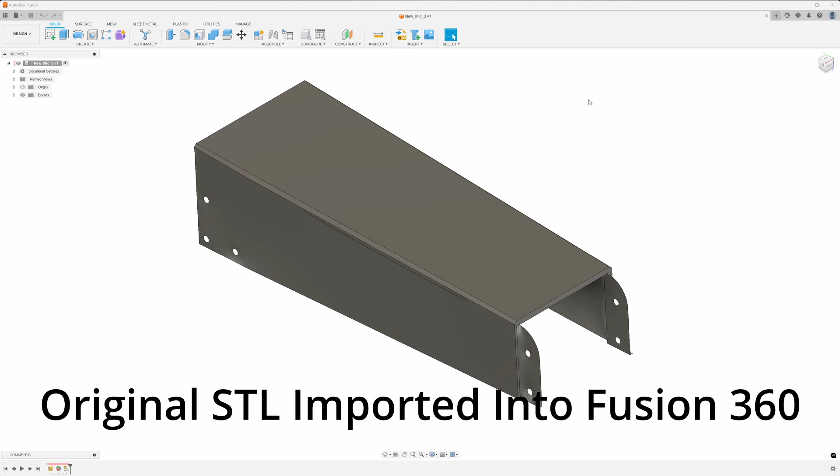Okay, so I imported each of the body sections, the mid 2, the mid 3, and the nose. The reason I do that is I want to take some dimensions from them, and that's all I want to do is take dimensions.

So I'm going to measure across the back of the flat surface. I'm going to go ahead and measure the front for just the flat section. I'm not worried about this chamfer area. Then I'm going to do one from the very front, excluding the tabs, to the very back. I only care about the visible top, that's all. I'm going to write those 3 numbers down, and then move on to the next one.

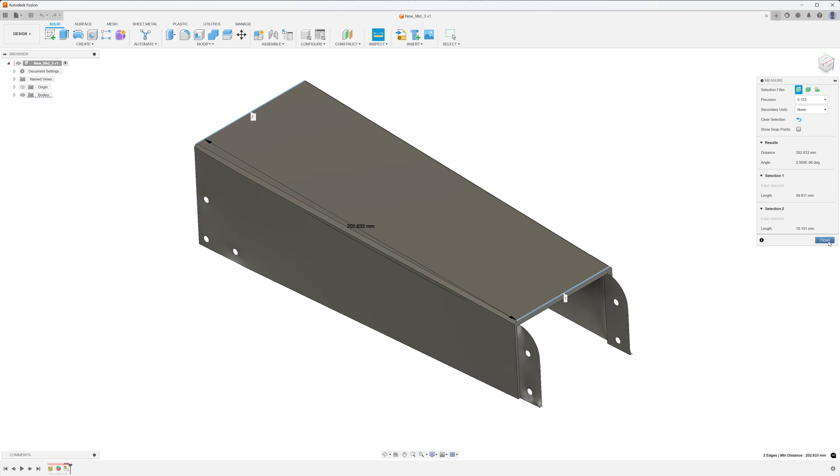The next thing I did was I started a whole new design, and came in and started from my first sketch. I drew each of the 3 pieces, here would be our midsection 3, 2, and the nose. All of these are turned into construction lines. That's all there is to step 1.

When I came down to the nose, this mark here at 155 millimeters, that is where the opening for the servo starts. Now I need to know where that's at because I don't want my design going into the servo area, that's my cutoff point. You can go down below if you want, but for my particular design, that was the ideal cutoff point.

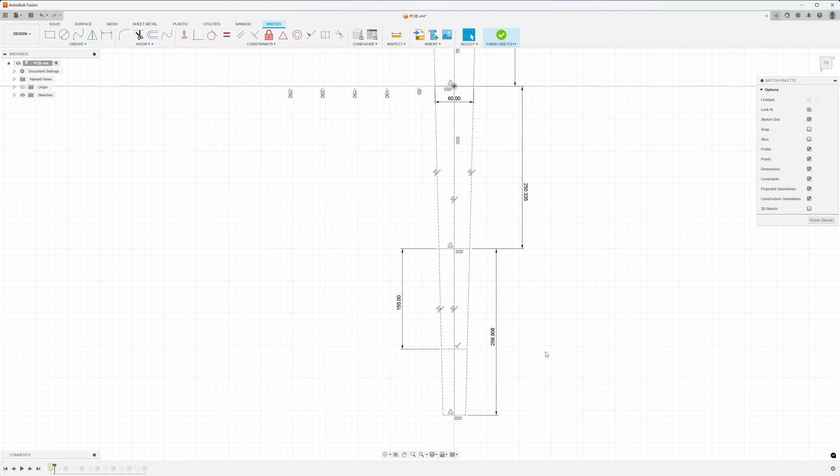The next thing I did, finish sketch, was I started a new sketch on that same surface. All I did was offset from each side 3 millimeters. The reason I offset that is I did not want my design getting too close to the edge because I'm not real sure how perfect this is going to work. So I just have these two lines as boundaries.

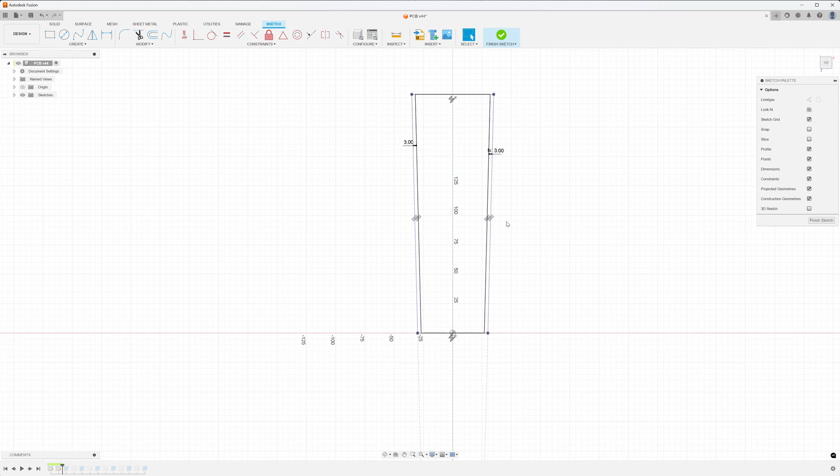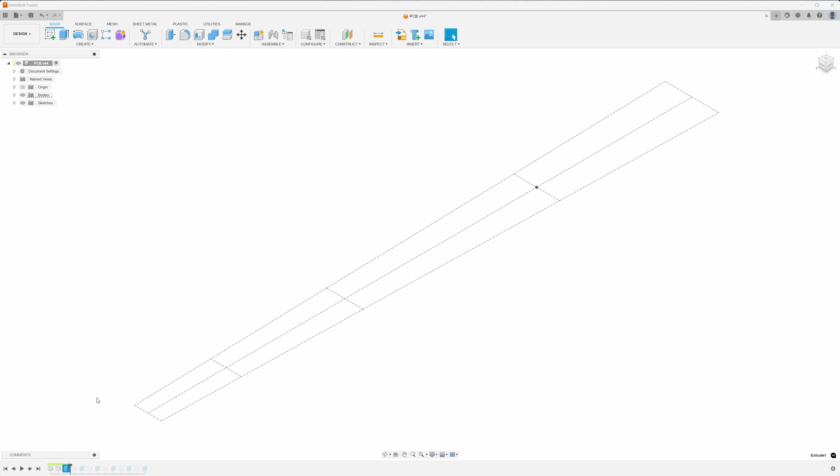What I do is I go ahead, finish that sketch, and do an extrusion of that sketch, just that section. Home view, so you can see what's going on here. So it's just this section here, and I'll show you my settings for that. I believe it was 1 millimeter, yes, I extruded upwards 1 millimeter. Go ahead and hit OK there.

The next thing I did was I started a sketch on the top surface here. I'll show you that sketch, and this sketch here is my actual design. See, there's a lot going to it. Doesn't look like there's that much involved when you see the print, but what I did was I drew up my design right here on this section.

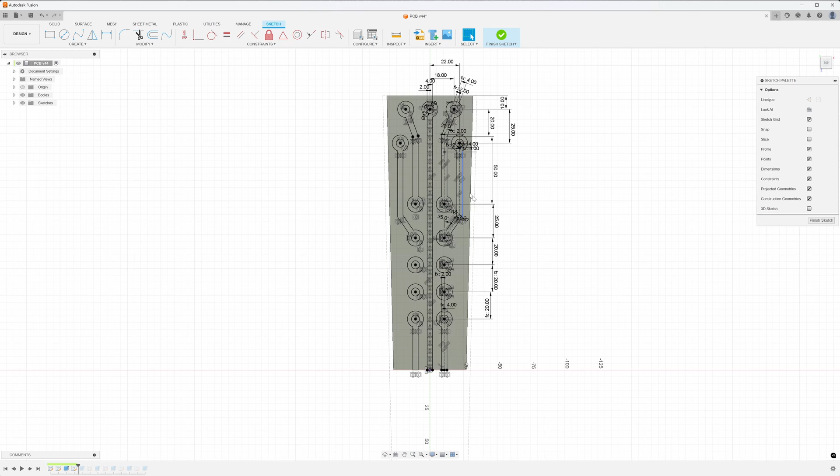I repeated this process for the next one and all the way down to the nose. Now let's go ahead and I'm going to finish this and show you what I did as far as my extrusion. I'll explain why I did it.

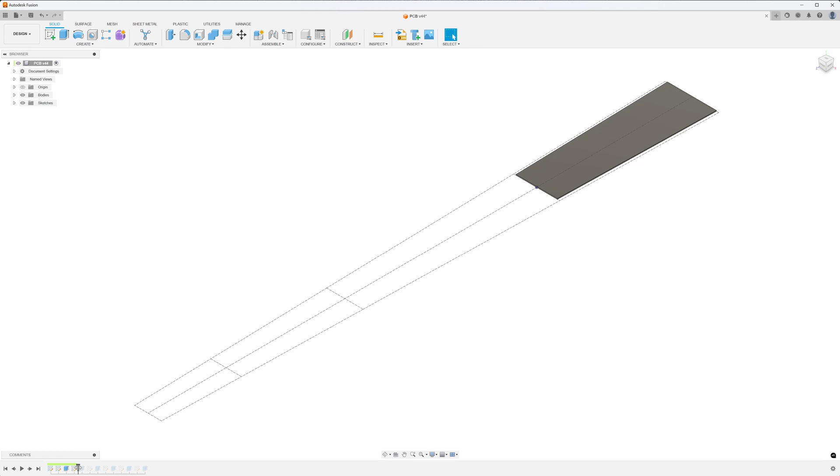So with the extrusion here, I also extruded this up 1 millimeter, and you'll notice that it is a join. The reason I did it this way, by having that first extrusion, the base, and joining this to it, it gives me one body. If I didn't do it this way and just drew all these individual shapes, each one would be its own body, and that's a lot more to work with than I wanted.

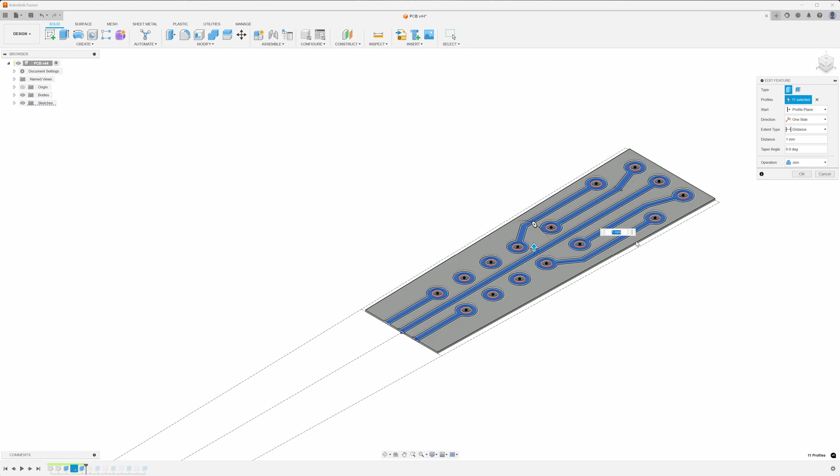It ended up working out better for me when I got to Bambu Studio. So I went and extruded this 1 millimeter. I had canceled that out, and I renamed that to be mid body 3.

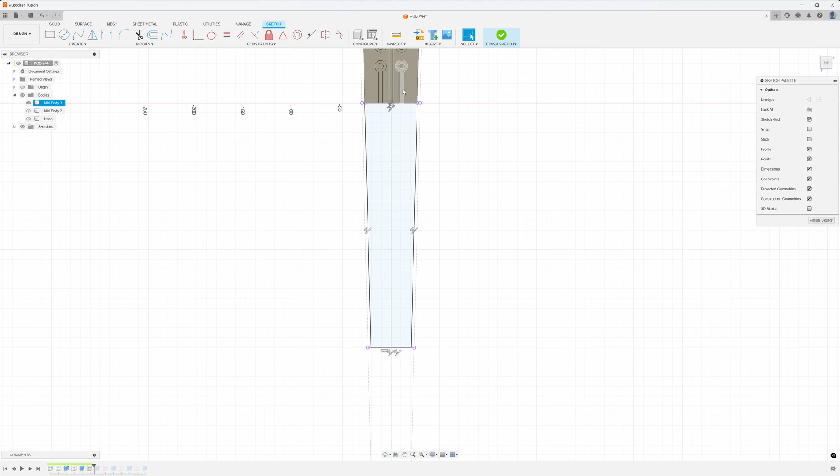Now we move on to mid body 2. I'll show you how I did that sketch. It's exactly the same as the first one. I went to edit sketch, just drew the outside shape, and made sure that these lines here were collinear to my lines above. I had my basic shape, finished that up.

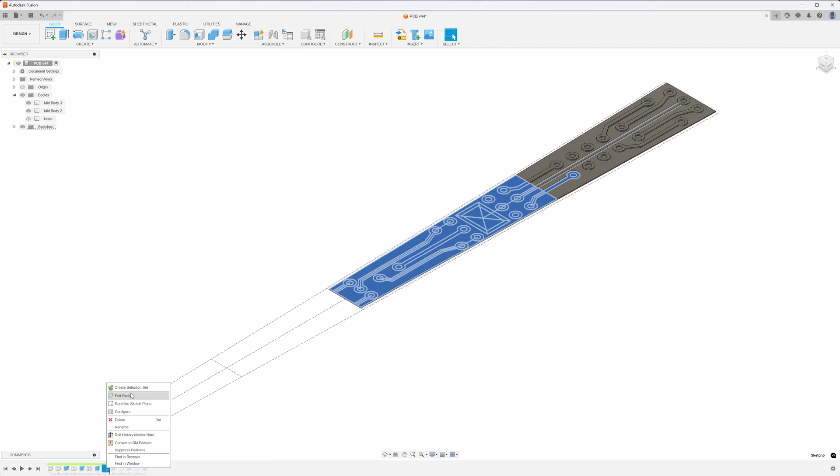I went ahead and extruded that just as we did before. I started a new sketch right here on the top of that surface. Let me show you that sketch. I'll start it right up here at the top. By having my lines collinear to each other, I was guaranteed that when I put my parts together, they'll actually line up. That was the whole point with that. It's real easy to do.

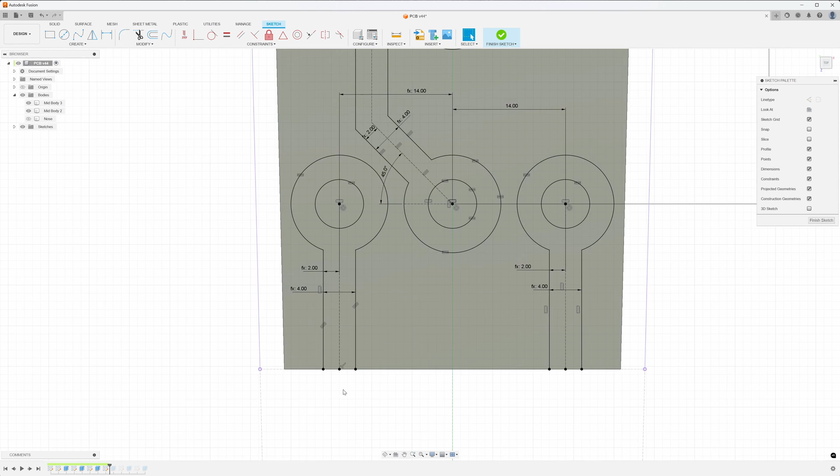You can see down here at the bottom, I'm setting up to do the same thing when I get to the nose section. I'm going to go ahead and finish this, and we'll take a look at the extrusion, which is going to be the same method I used on the first one. I extruded that up also 1 millimeter, and it's also a join.

Now, the one thing I do need to point out is I'm going to come back here to my base for this one, and we'll look at the extrusion real quick again. Notice that it is set as a new body. Extrude that as a new body, and then when you come to this feature here, make sure you extrude that as a join.

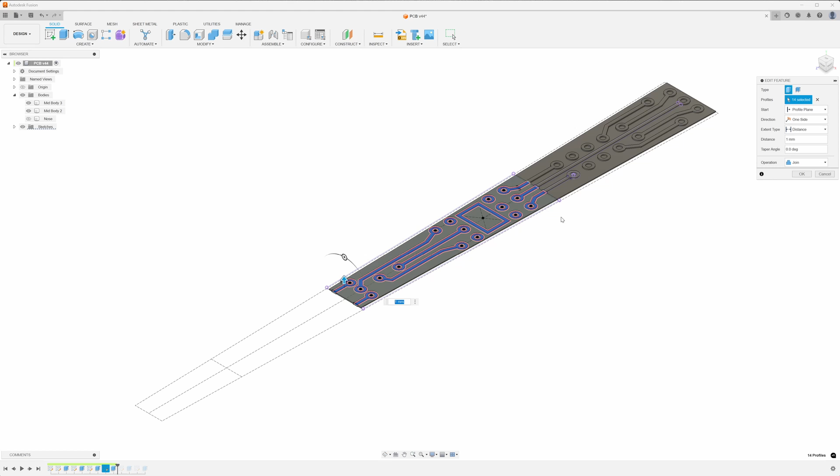And if you want to guarantee that it's going to join to this new body instead of the first one, what you do is hit the eyeball while you're doing your extrusion, and that'll turn that off. The base will become a new body, and the next extrusion just joins to it. You can see where I named that mid body 2.

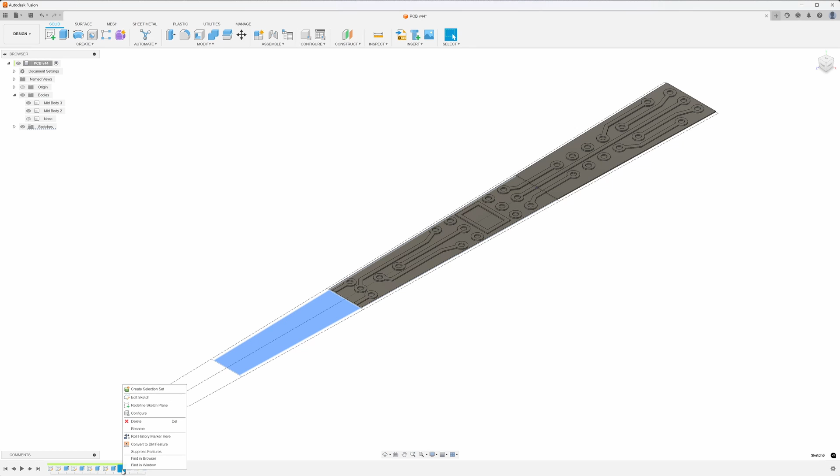So let's go ahead, I'll turn that back on just so we can watch what's going on here. And I move on to my next sketch, which is the nose, using the dimensions that we took earlier. You can see where I cut everything off at 155 millimeters, the overall length on that, so it would not go into the area of the servo.

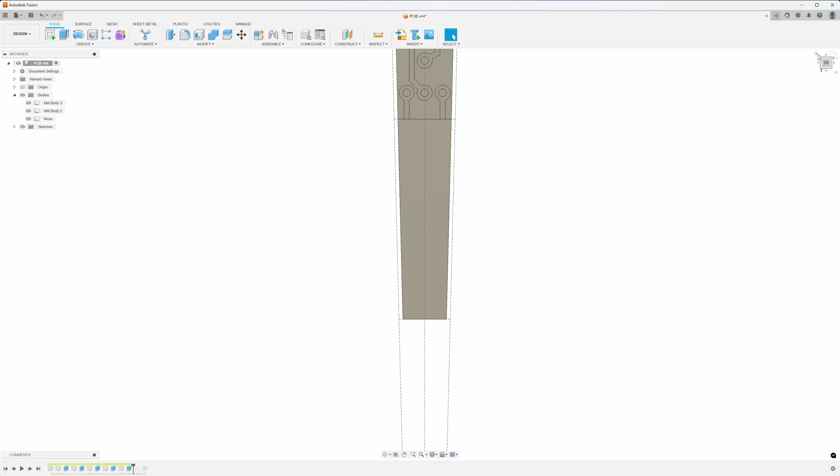It's the same thing, I finish the sketch, come in and do an extrusion. This extrusion here is going to be a third body, which again, new body. That's what I did, same way as before. I came back, started a new sketch on top of this surface, and lined everything up once again like we did before. Lined it up here, so when I put the pieces together, they're all looking good the way they should.

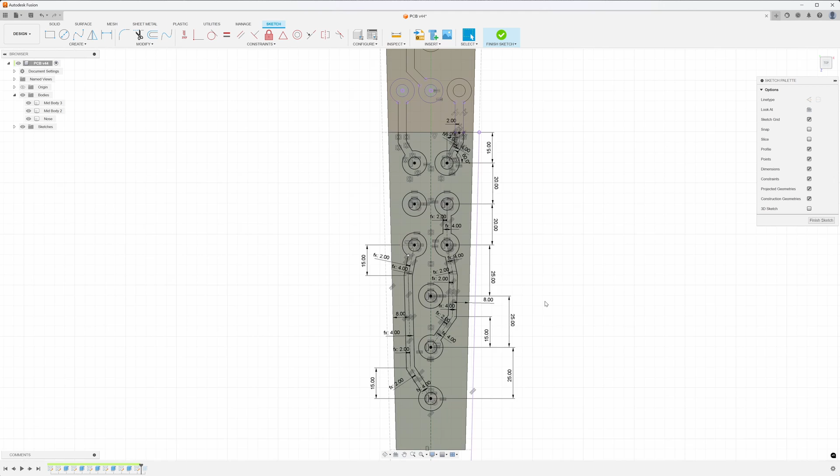I finished everything out, and my design stopped right here. The servo area is right here, so I go ahead and finish that up. Back to our home position, and we'll take a look at that. And there we go, all of our pieces line up.

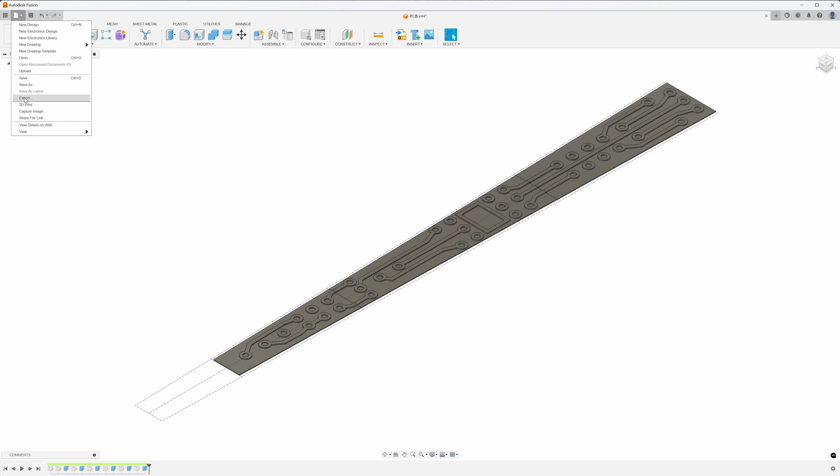Now, the normal reaction from a lot of people when they're working with Fusion is to come up here and hit the export. In this case, what I want to do is right click on mid body 3, and there's one in the middle here, so right click, hit save as mesh, and it'll give you your options, hit OK, and tell it where you want it to go. Do the same thing for the other two.

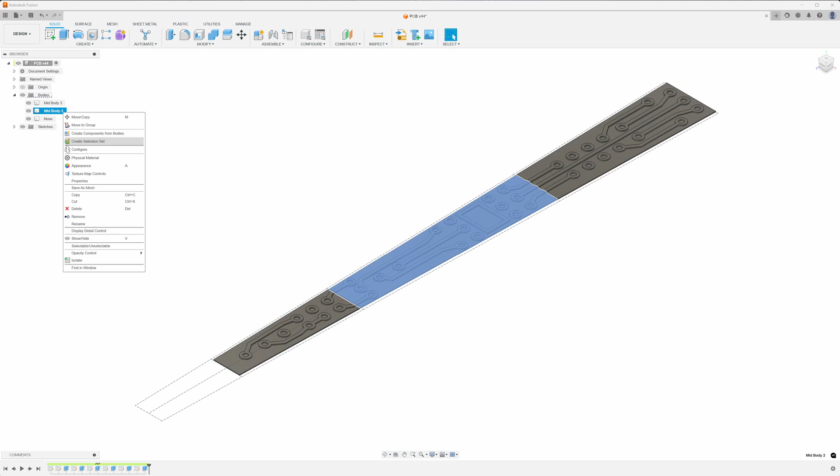So we got mid body 3, we got mid body 2. You'll want to come down, save as a mesh, hit OK when your settings are the way you want them. Actually, the settings you're looking at in this dialog box are the settings I used. Go ahead and export that, and then the same thing with the nose. That way you're guaranteed that all 3 come out as 3 separate STLs rather than one big long STL. And that's going to be important when we get into Bambu Studio.

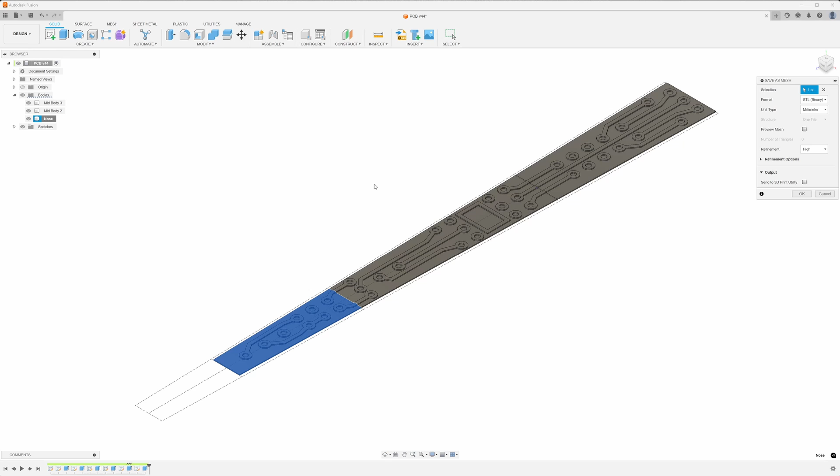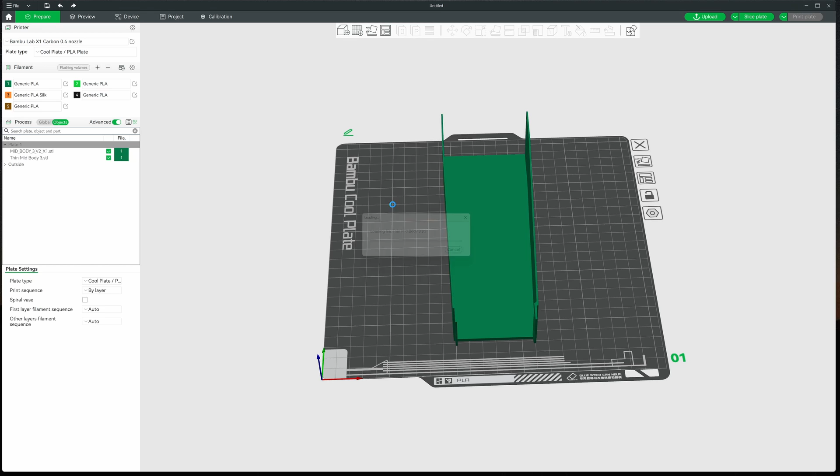Let's jump into Bambu Studio and I'll show you how I put these together. Okay, so I have my body section loaded in, and the first thing I'm going to do is rotate it. I want it to be straight up and down, front to back when I'm working. Okay, good there. The next thing I want to do is bring the piece over that I drew, which corresponds to this body section. So I'm just going to drag that over, and there we have it.

The first thing I'm going to do is change the filament color so it's easy to see. I'm going to want to use this color anyway in a little bit. Next, I'm going to come in and make sure that this surface is laying flat on the print bed.

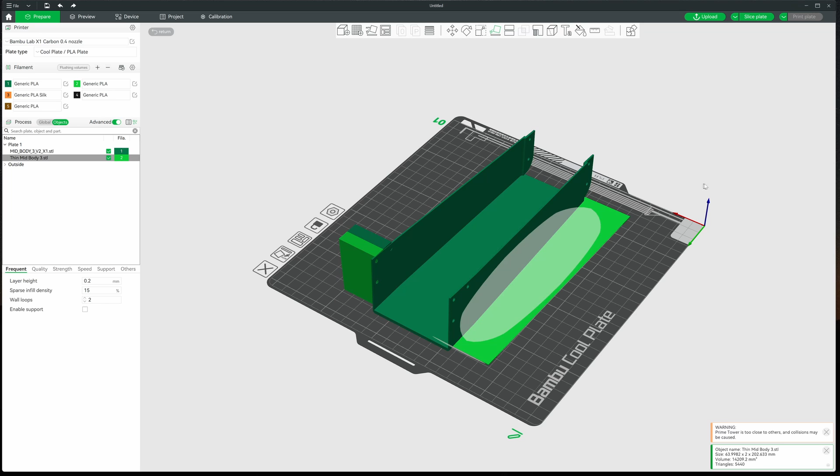Go ahead and I'll do that. When we look underneath, I can tell I'm oriented in the wrong direction. We'll fix that real quick. Click, I'm going to rotate that 180 degrees.

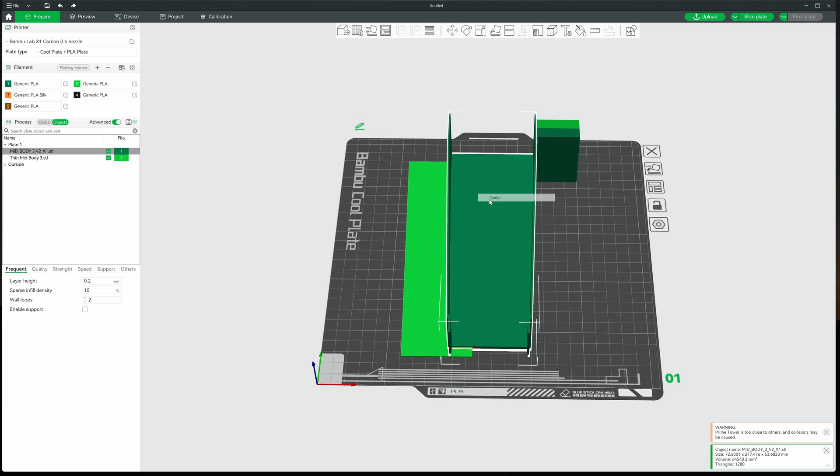That looks better. Next step, I'm going to click on my main body, right click on it, and hit center so it's centered on the bed plate. Then I'll do the same thing with my part from Fusion, go ahead and center that. Now I can tell just by looking at it that it's not lined up right.

Not a big deal. What I like to do is come straight on from the top. Turn that off so we can watch what's going on.

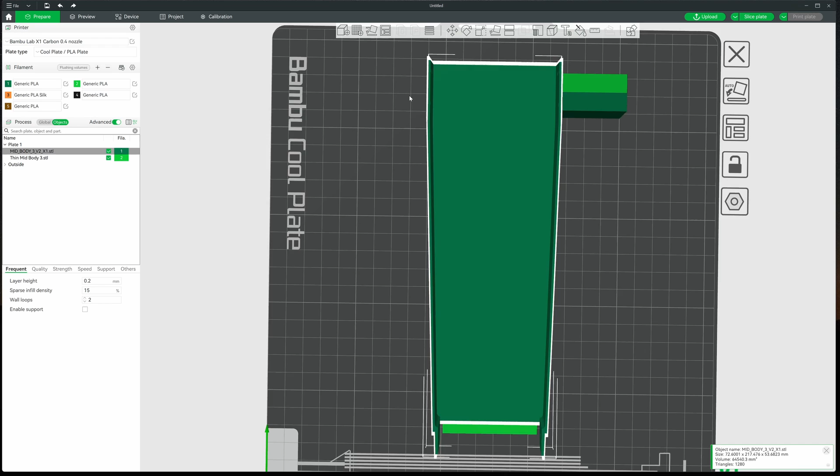I'm going to do a move, just drag it up. Wrong piece, that happens to you. Just right click and center it again. Good, I want a part from Fusion.

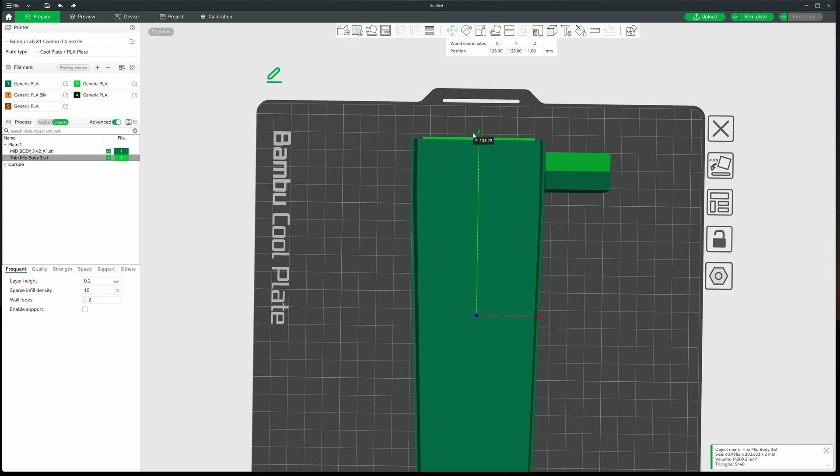There we go, drag that up and you can see it peeking out there. I'm just going to move that until the edges are lined up. Pretty good. So when I come underneath, I can see that I'm lined up on end the way it should be. So we're good there.

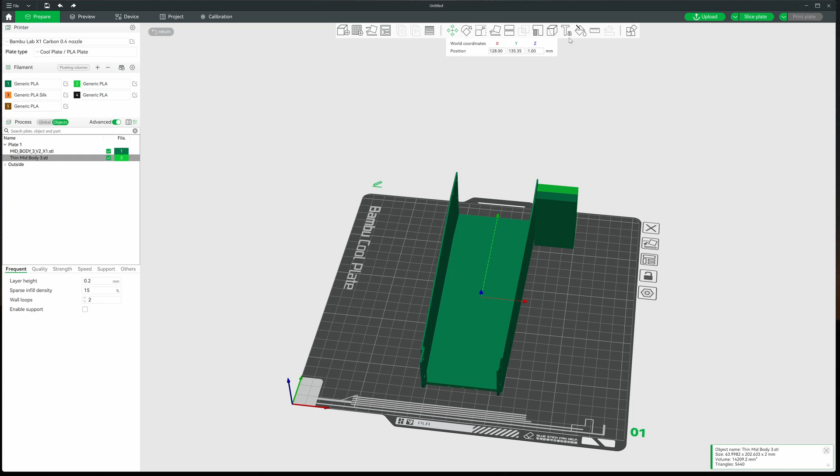Now I want to do some painting on that piece from Fusion. Actually, I don't have to turn off anything, I already have it selected from objects over here. I'm going to go to paint, and what I want is my base to be the same color as my main body.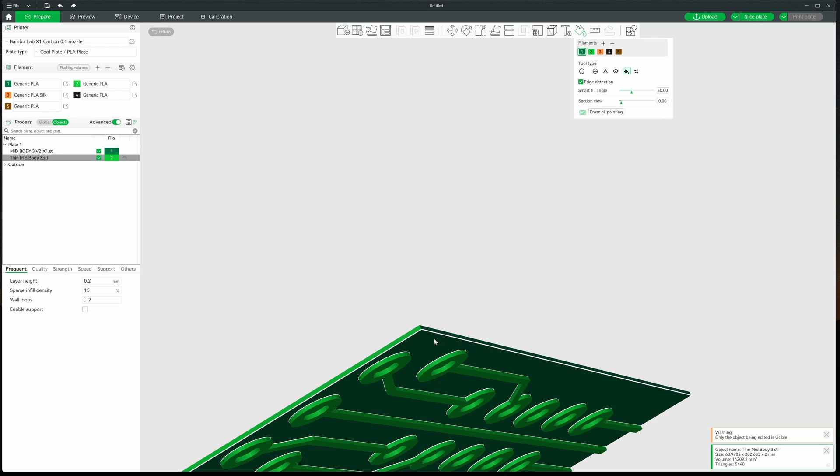All the edges except for this front edge - the front edge I'll leave the way it is. I'm going to go ahead and change the other edges in here real quick. By having that the same color, and it'll make more sense in a little bit, that will save me filament. Otherwise I'd be doing a lot more color changes.

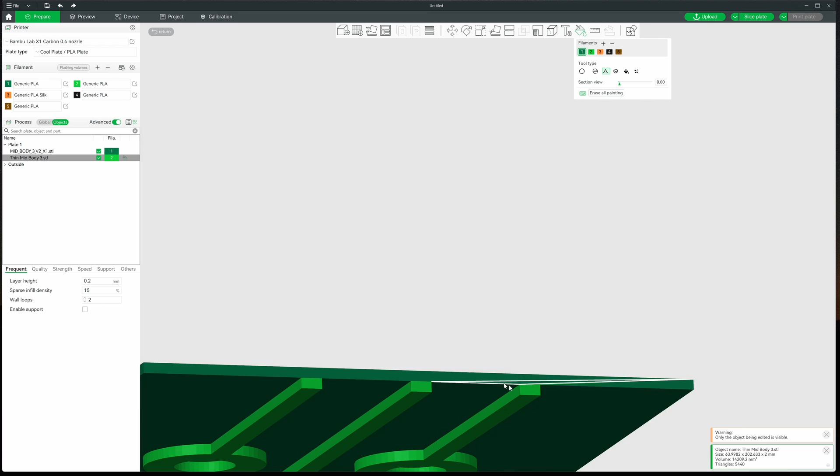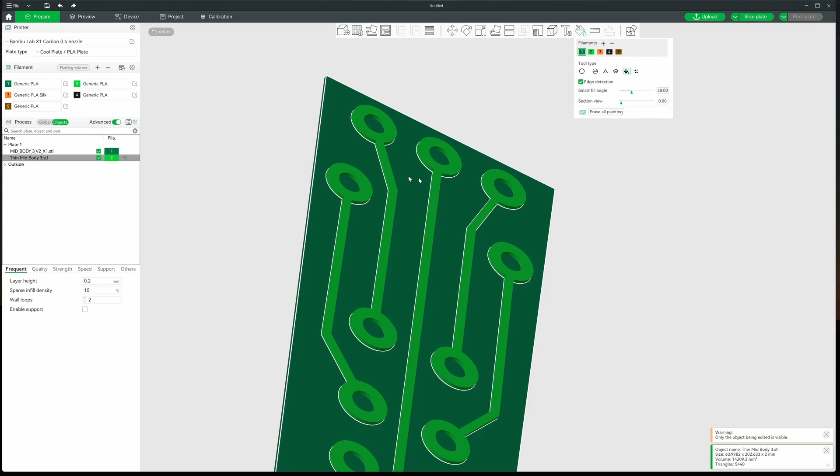All right, so I have everything painted the way I want. No, not really - I want to go back using my bucket tool. I'm going to fill the inside of all of these solder pads. But what I also want to change, I have some copper filament, copper PLA silk actually, I want all my solder pads to look like copper.

So I'm going to come in here, select the right color first. The reason I'm going with the triangle is so I can block off these points. Then I'll go back to the bucket. Otherwise the bucket would fill the whole line, and I don't want that.

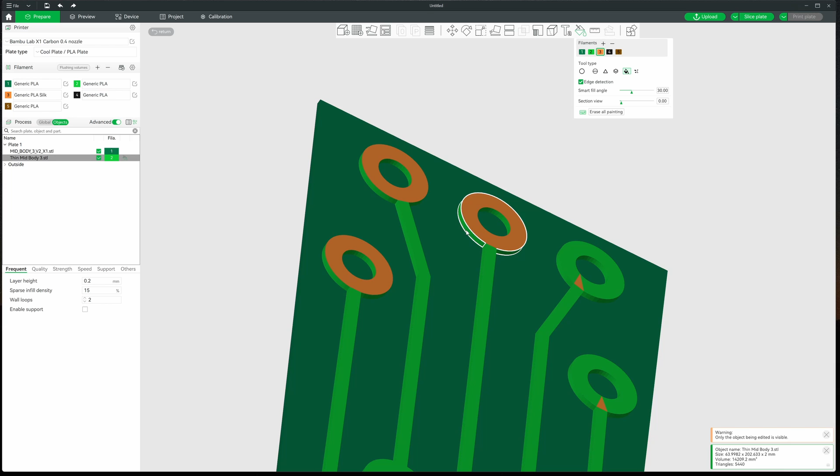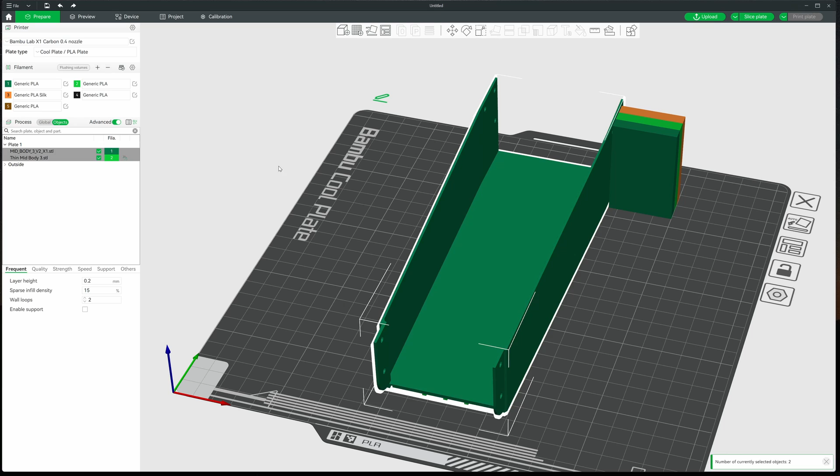Okay, we have everything painted up. Go back to work, what I'm going to do is flip this back over. Now I'm going to select both pieces. You can do it by coming over here to, when you're set to objects not global objects, click the first one and hold your shift, click the second one, you got them all.

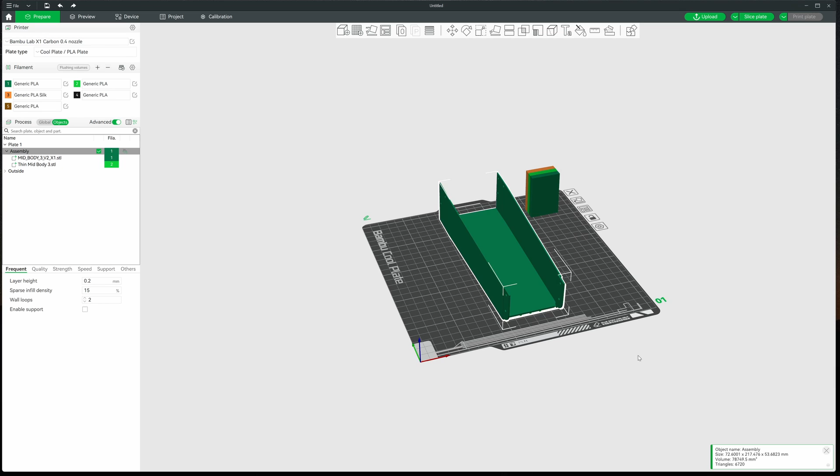Another option a lot of people like to use is from out here, using the shift window, which will select them all. It doesn't much matter. So now that I have that on there, what I'm going to do is right click and hit merge. And now I have one body, one piece.

I can send this to the slicer and get my color print, hopefully looking like this. Go ahead and slice this up, take a quick look at it. It's going to take roughly 2.5 hours total. And everything's looking good.

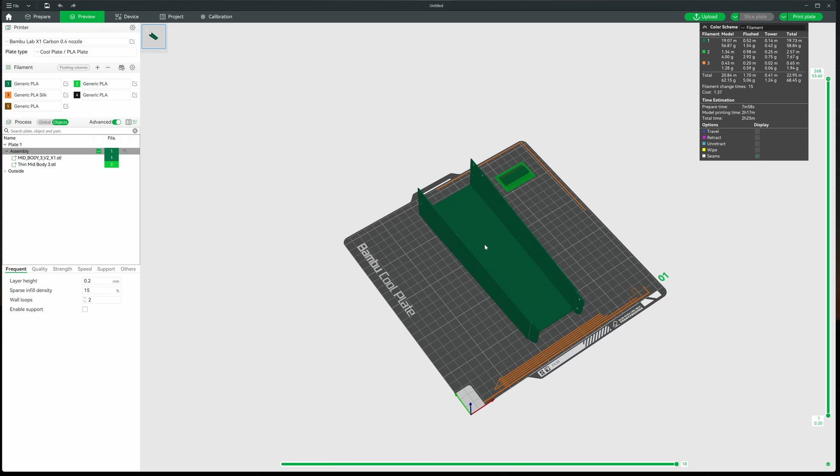I'm going to go ahead and do one more thing here. If you're working on one of the other sections and it's too big, all you have to do at this point is come back to rotate. Rotate it back to 45 degrees, you can go ahead and do that. In fact, I will print it this way.

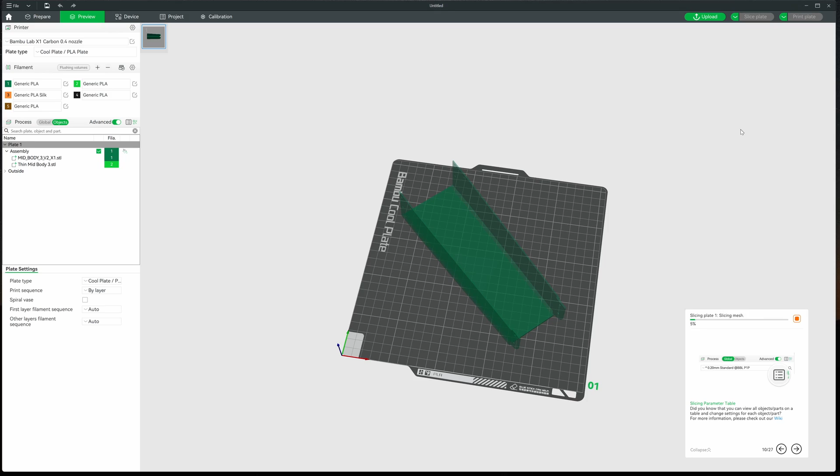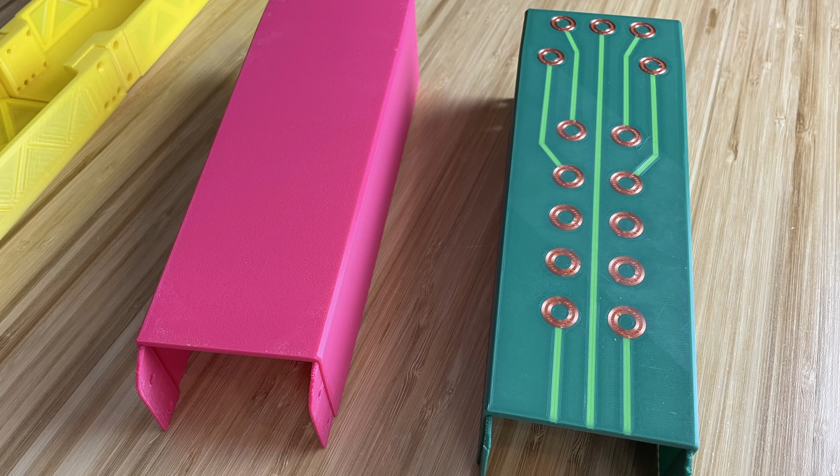Let's go ahead and we'll slice this up and print and see what it looks like. These came out pretty good, and it adds a little bit of something to the body. It wasn't hard to do, and I really like the way the copper silk PLA works on there. I don't think a brighter yellow or other color would have worked as well.

Now, you can use this same technique on other files. It's not limited to just the dragsters - it's only limited by your imagination. Take a look at that. Let's get the nose on there too. There we go, I can't wait to get this together.